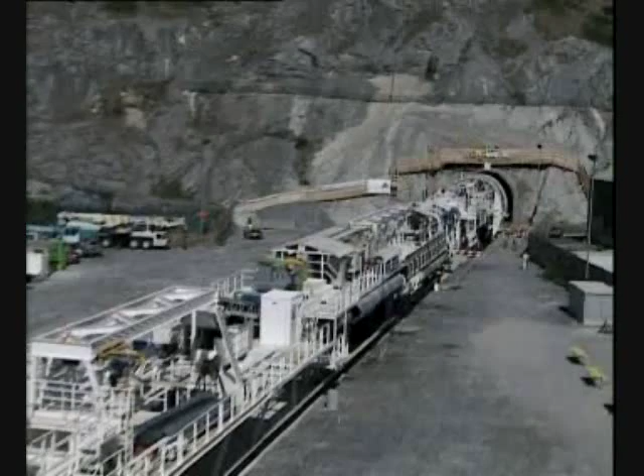Herrenknecht's tunneling systems are mobile tunneling factories. Not only do they dispose of excavated material.

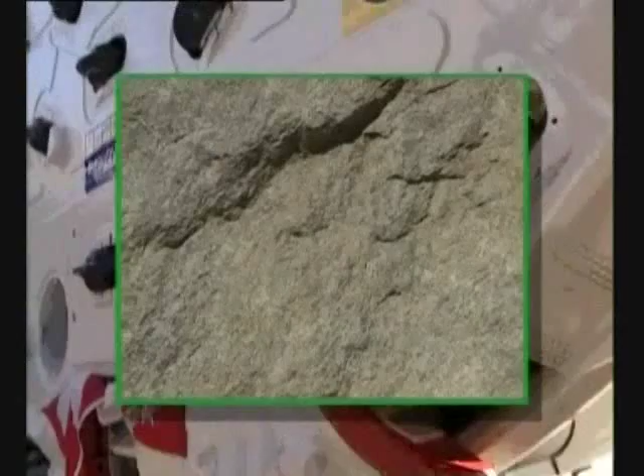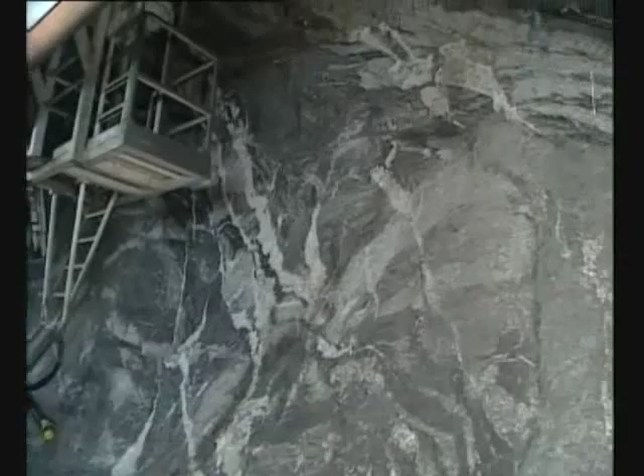One major feature of this TBM concept: mechanical rock support is already available 4.2 meters behind the cutter head. This early support is necessary to prevent collapse and to secure loose material, even in solid rock.

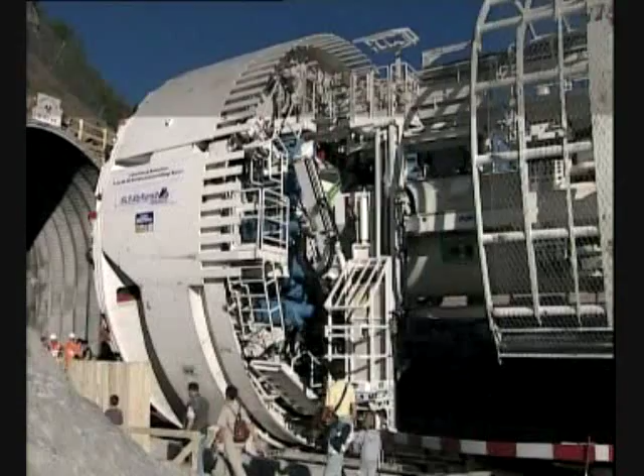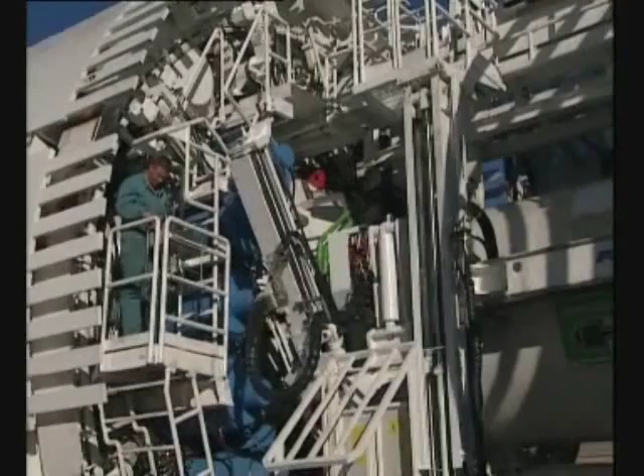The so-called L1 work area between the gripper shield and the gripper shoes was carefully designed as a secure workplace. This area provides for rock support and has a ring erector, 2 independently operating anchor drills, and a wire mesh erector.

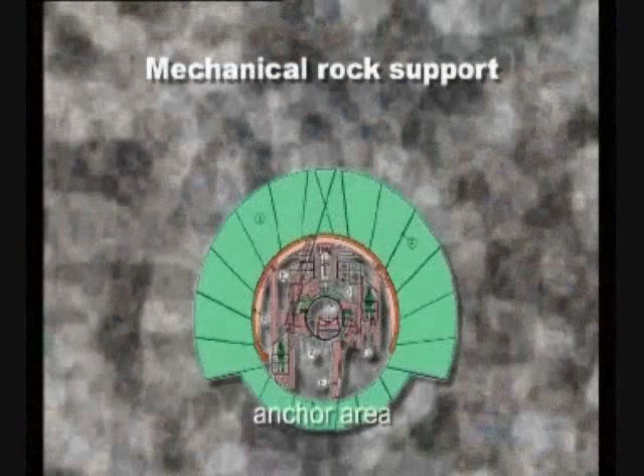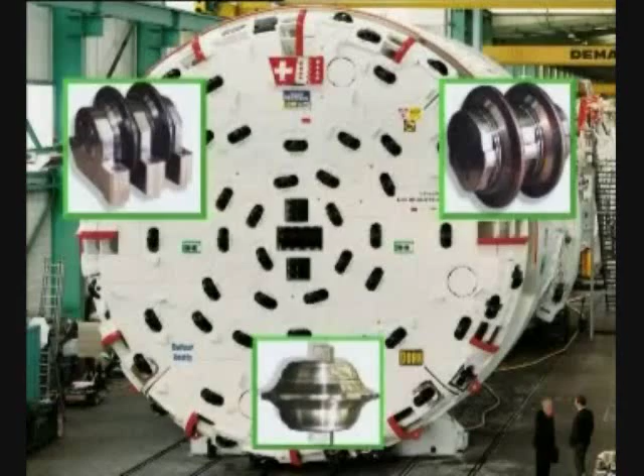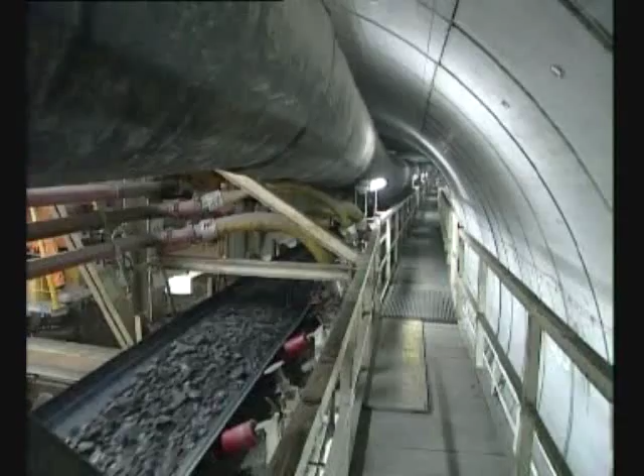The excavated material must be continuously removed without interruptions, from the rear of the machine. These systems operate all over the world and are successfully accomplishing mission breakthrough.

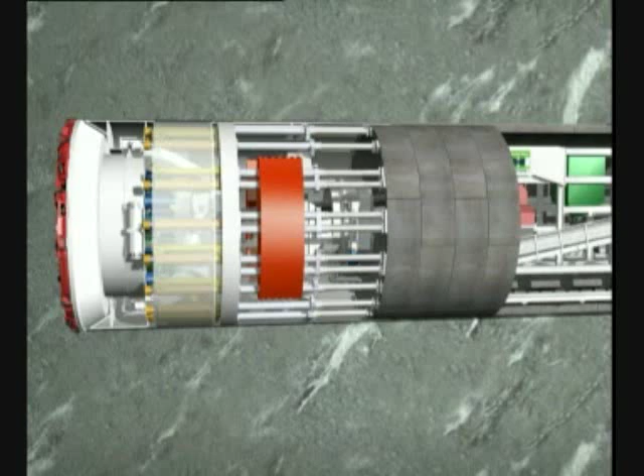They can be flexibly modified to the respective geology of the tunnel line, since they combine the gripper principle and segment lining in a specifically coordinated process. In the tail skin part of the tunnel boring machine, reinforced concrete elements are installed.

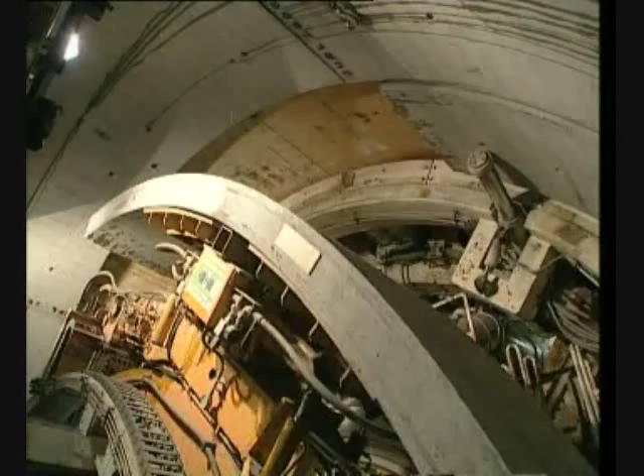The drilling equipment has proved successful under all geological conditions. A breakthrough mission always requires...

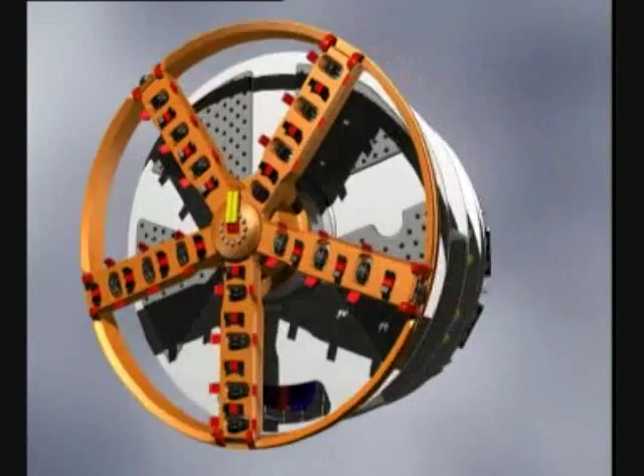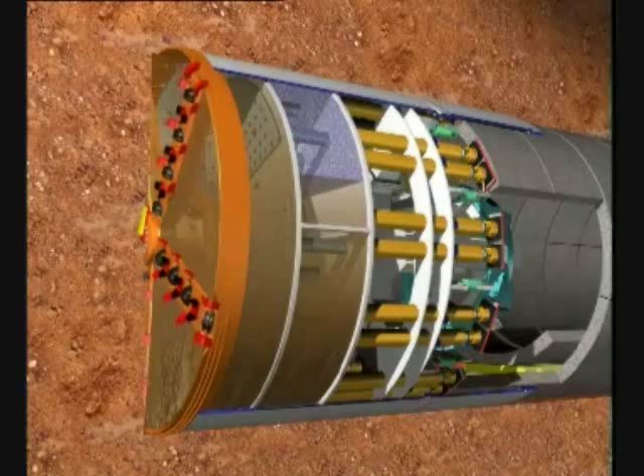...under the protection of the shield. The stability of the face is ensured by a filter cake placed ahead of it, formed by the bentonite suspension under slight overpressure.

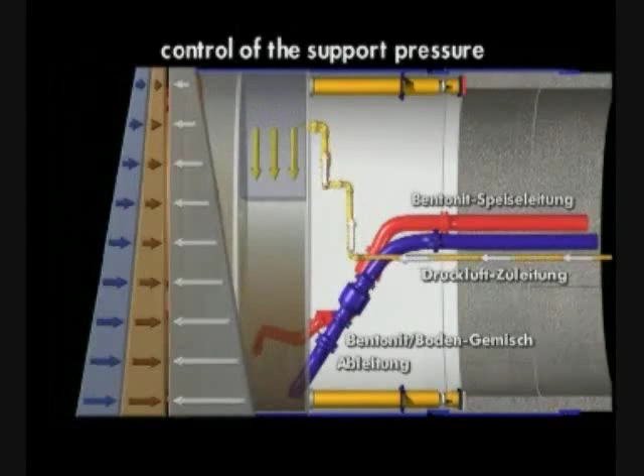A compressed air chamber behind the submerged wall makes it possible to precisely regulate the pressure, and thus, in contrast to the bentonite shield, reduce the drive torque and cut down wear at the same time. The foam is injected into the soil ahead via nozzles installed on the cutting wheel.

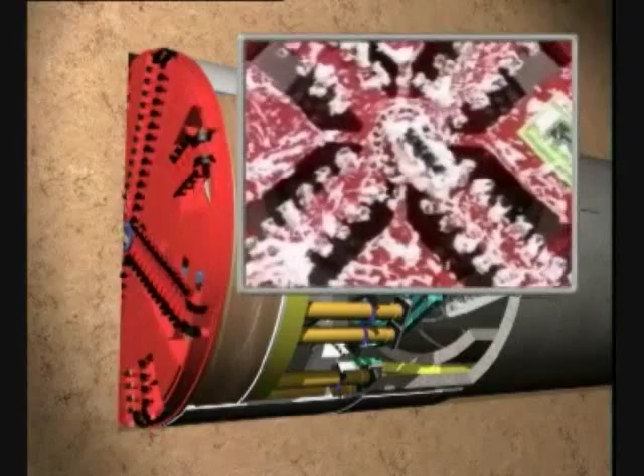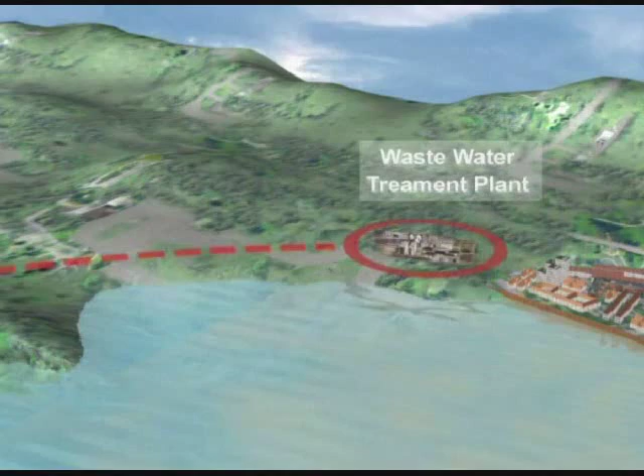Here you can see the old, rather short pipeline ending at low depth in the harbour. As a result of the weak current, a pipeline to the onshore shaft is needed, from where the new sea outfall pipeline shall be jacked. The shaft is usually located in the coastal area, which protrudes furthest into the open sea.

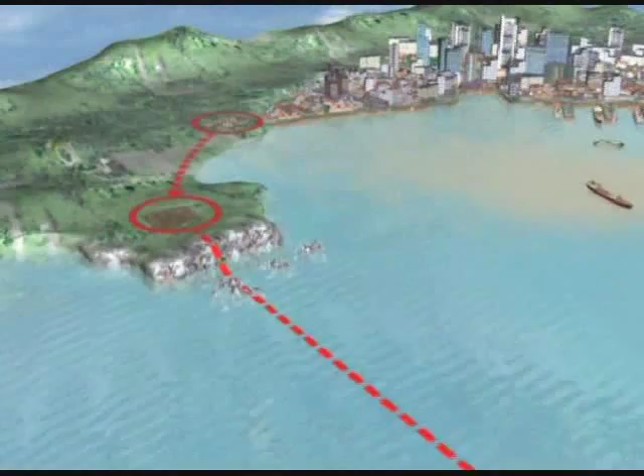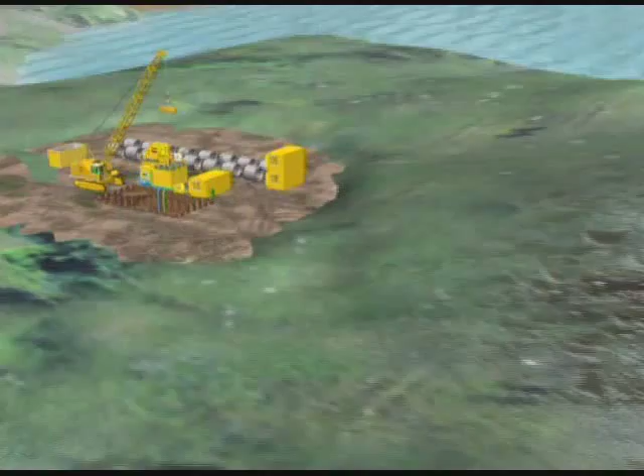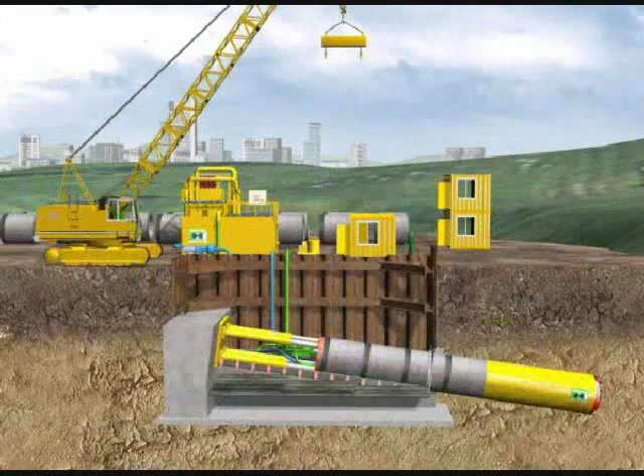Herrenknecht micro-tunneling equipment is perfectly suited for rock and mixed soil conditions under groundwater. This onshore shaft was constructed with sheet piles. It is approximately 8 meters deep with an inclination of 8 degrees.

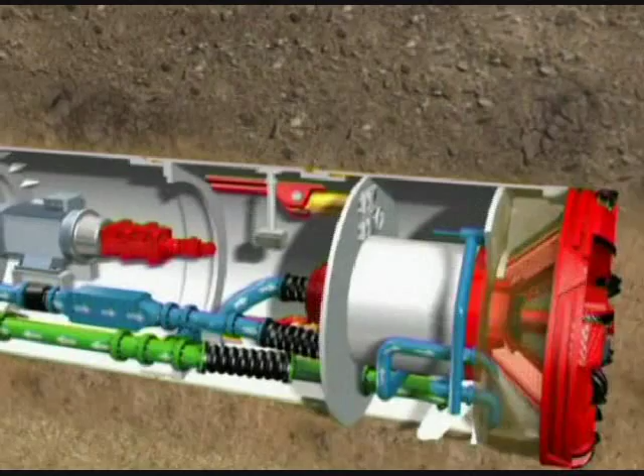Behind the cutting wheel, the material is picked up in the slurry circuit and transported to the separation plant through the slurry discharge line. This line passes through the machine and the jacked pipes up to the surface. In the separation plant, the excavated material is separated from the water.

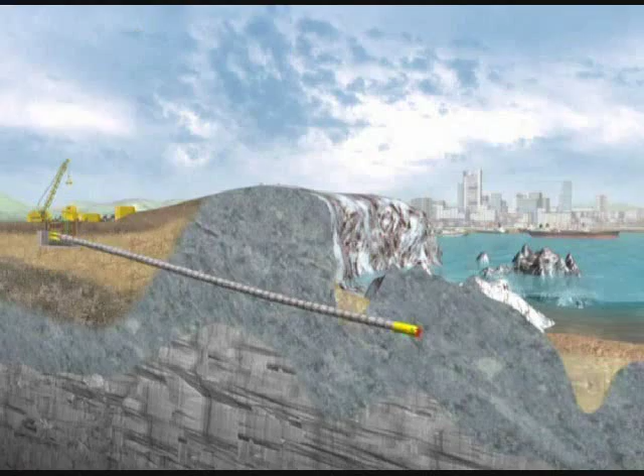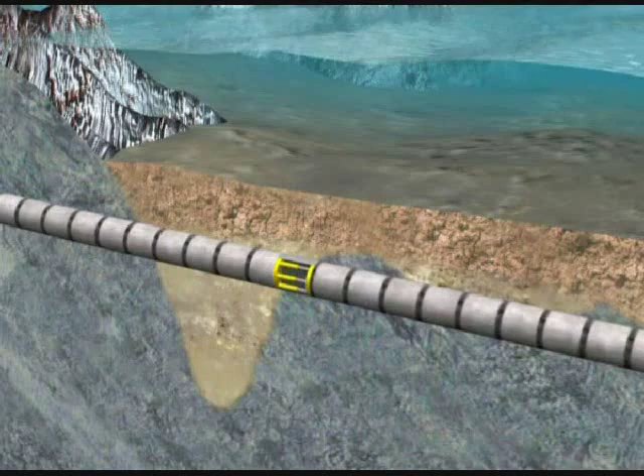To keep the jacking forces of the jacking frame as low as possible, so-called intermediate jacking stations are used during this long-distance pipe jacking. Every intermediate jacking station only jacks a section of the pipeline, so the required jacking forces can be kept at a low level.

With this method, it is possible to realize long distances. The arrival point is located 25 meters below the water surface.

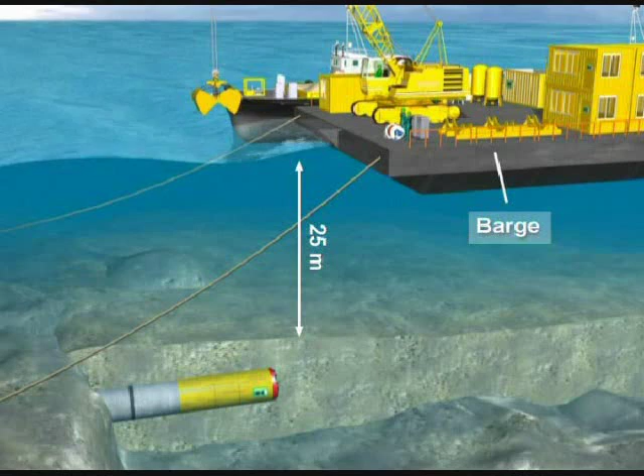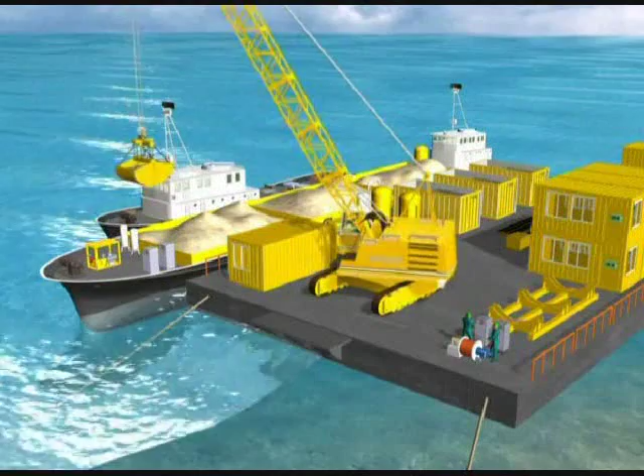Part of the soil covering the machine is excavated, the rest sucked away by a scuba diver and separated in a settlement tank, and a crossbeam is assembled onto the machine.

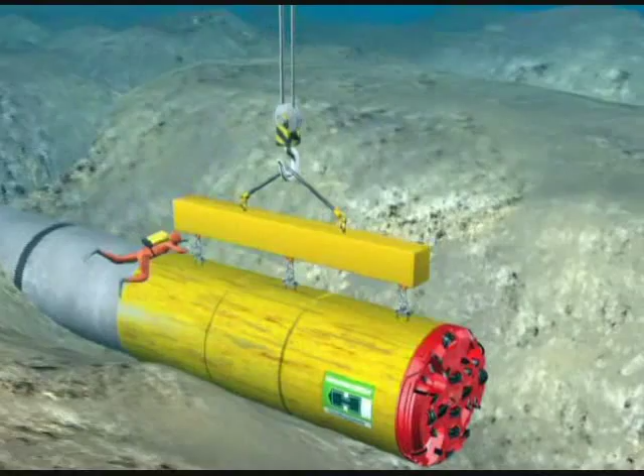4 hydraulic cylinders are installed in the rear part of the machine. To separate the machine from the first product pipe, the hydraulic cylinders are extended.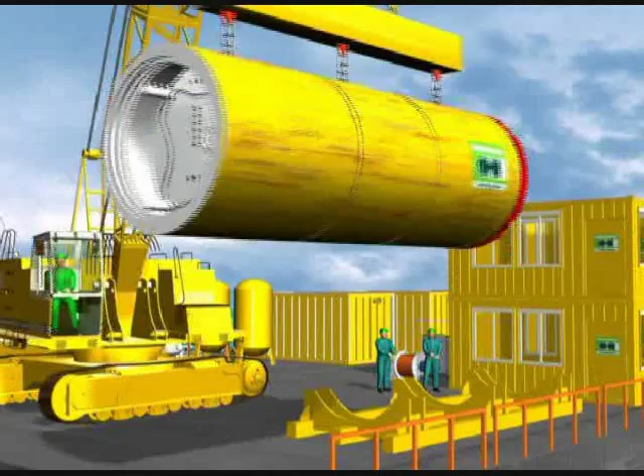The recovery itself can begin, and the machine is put on a frame on the barge, which returns the tunnelling machine to the harbour.

The diffuser itself consists of prefabricated reinforced concrete units. These are lowered into the reception pit and connected to the pipeline. Afterwards, the pit is filled up.

A depth of approximately 25 meters below the water surface is sufficient. The pollutants are rapidly washed away by the currents near the sea bottom. A large quantity of seawater is available.